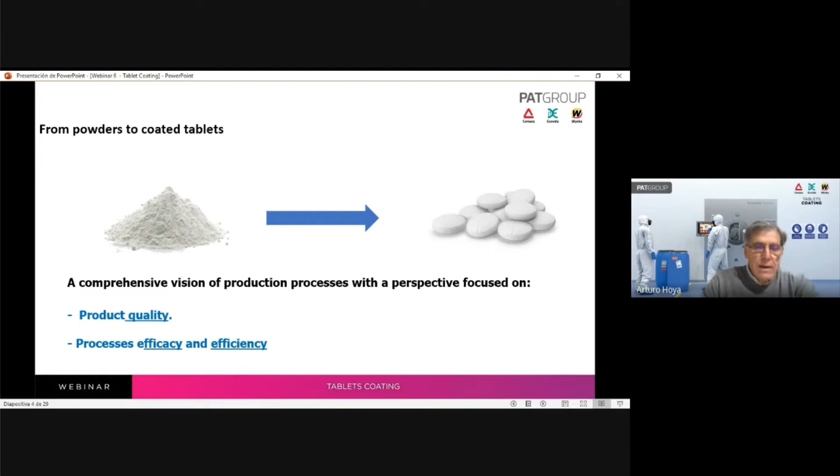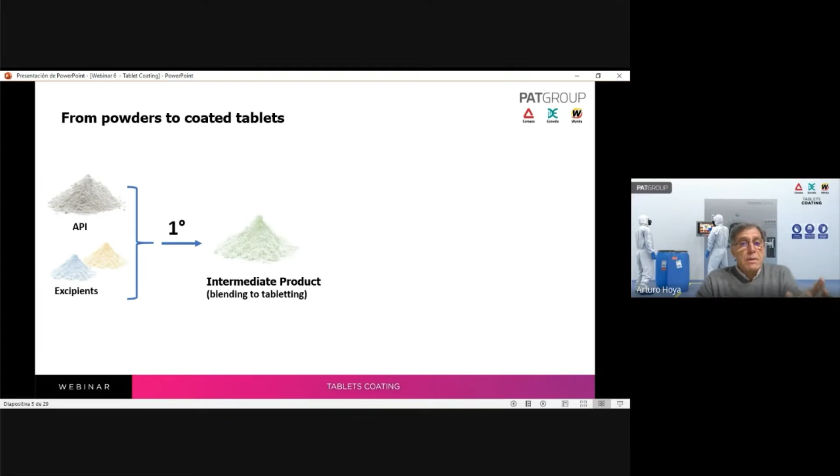Here I show the sequence from the raw material, API and excipient powders, transformed into intermediate product. We saw this in the first webinar. The second step is transformation into the tablet, and today we will present the coating of these units. This is the process.

In many cases, this unit operation, the coating, is the last operation, but not only the last, it's also a critical operation, because the tablet will be sprayed with solvent, normally water, and this requires a very, very tuned process, very controlled, very monitored, very automatic process. This is a very important question.

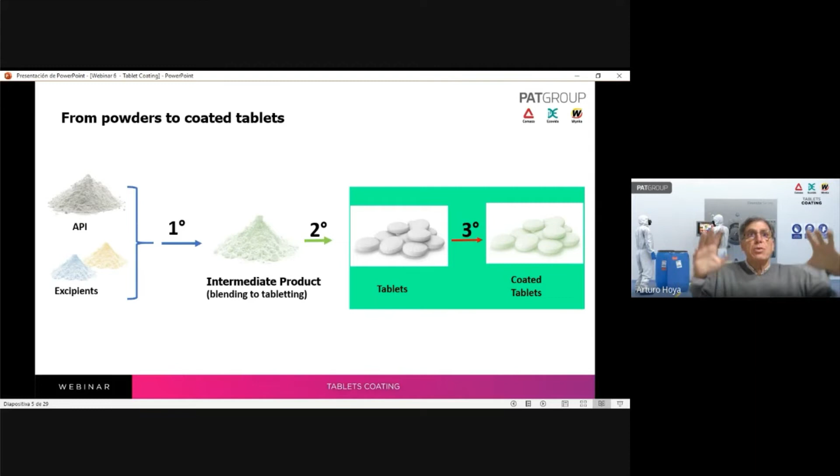This is true because we need to reach a thermic equilibrium into the drum of the coating machine. Coating and thermic equilibrium.

Let's read: Tablet coating is a process of continuous application of a suspension or solution on a bed of tablets in continuous movement, with permanent entry of drying air that provides the amount of calories per unit of time necessary to evaporate exactly the same amount of solvent that is applied, and in which the temperature of the tablet is kept constant.

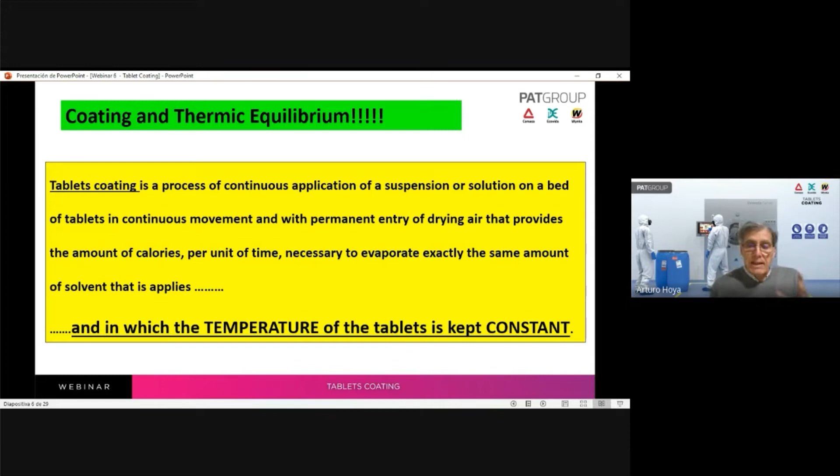This is very important to keep in mind, because any imbalance between the solvent flow rate - grams per minute of suspension or solution introduced in the tablet bed - and the calories added per minute by the drying air, can determine the spoilage of the batch of tablets. This is a very big and common problem in the industry. If you do no control or no monitoring, you can fall into this type of problem. We will come back to this aspect of the process in the next slide.

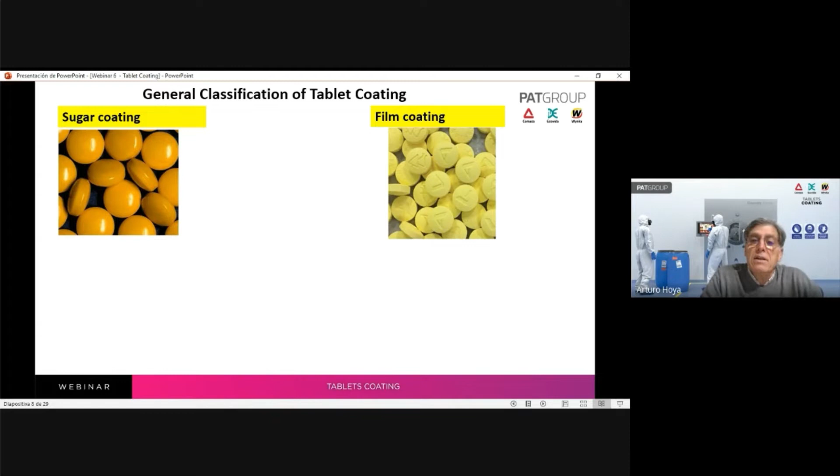But now I wanted to take a look at the classification, the general classification of tablet coating. You remember that the older coating was sugar coating, and the more modern one is film coating with a polymeric material. This film coating is normally water-based, though it could be organic-based, but more commonly water is the vehicle for the polymeric suspension.

In comparison between them: in appearance, tablet coating with sugar has an excellent finish, rounded and shiny, while tablets with film coating preserve the contours of the tablet core. The weight gain in the case of sugar coating is very high, 20 to 50 percent, while in the case of film polymeric coating it's 2 to 6 percent, which is very small.

Logos and engravings are not possible with sugar coating, but they are possible with film coating. Look at the photograph. As for coating thickness, with sugar you have millimeters of thickness, but with film only microns, 20 to 200 at maximum.

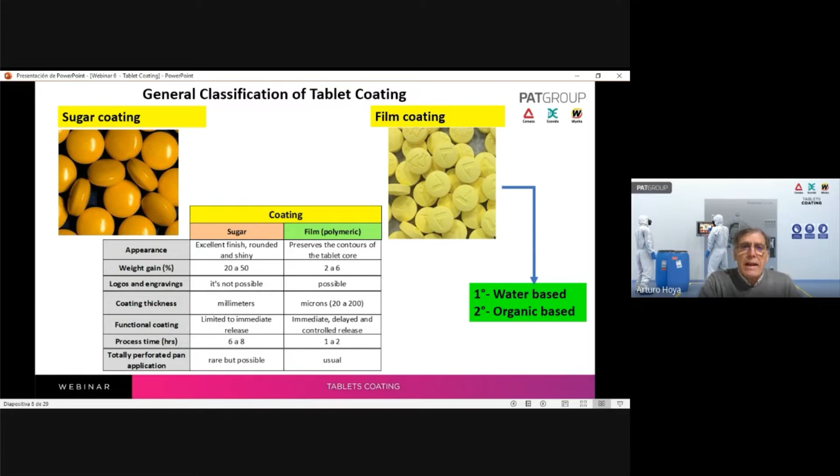Now I wanted to show you some qualities of film coatings. The finishing product is very, very good.

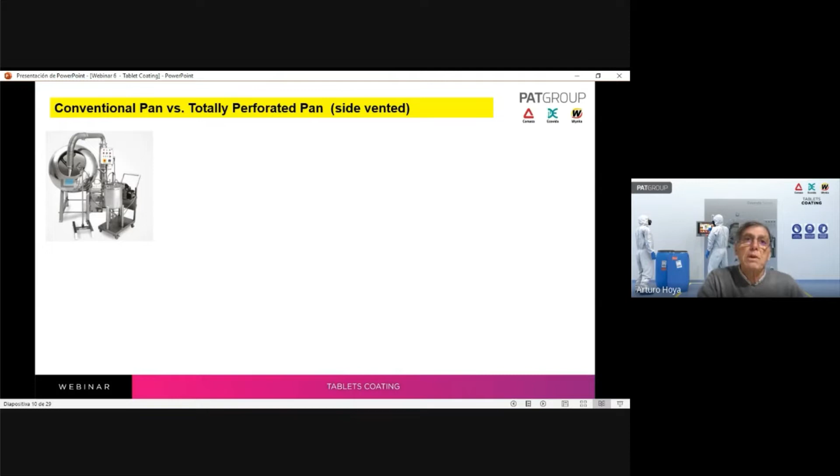I want to show you this comparison between the conventional pan and the totally perforated pan, called side-vented, because the drum inside the machine is totally perforated with holes about 2 millimeters in diameter. This is a typical conventional pan.

Automation is minimum in the case of conventional equipment because it's older, while you have total automation when you have a side-vented pan.

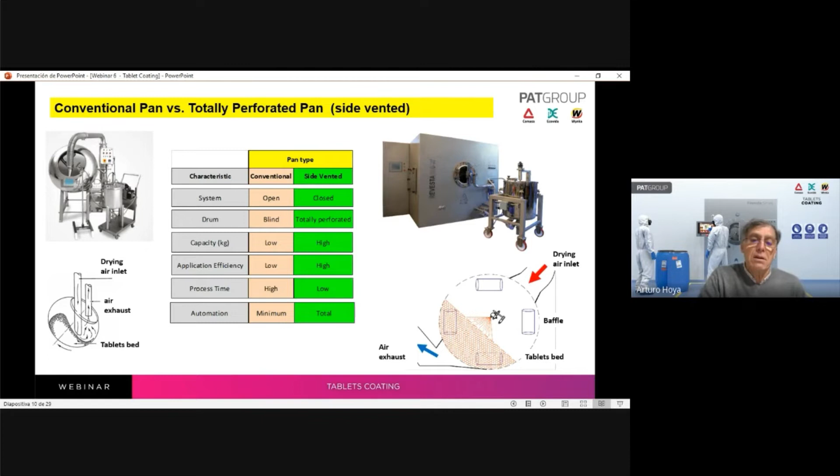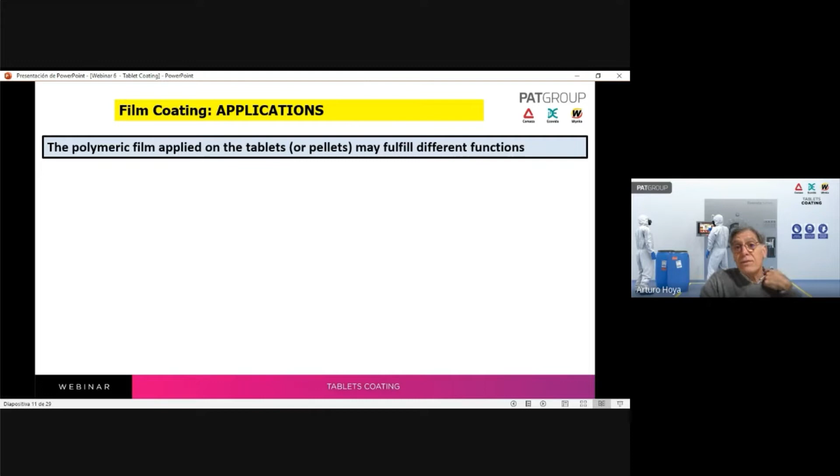Now I wanted to show you some applications: when do we use tablet coating? The polymeric film applied on the tablet or pellet may fulfill different functions. The first and most common function is identification, appearance, and marketing. We call this cosmetic coating; it's very common and the frequency is high.

Then you have the possibility of taste masking. This is common too, because much of the API, the drugs, have a bitter taste, so you need to cover this. By using film coating, you can neutralize the bitter flavor.

The other question is the stability of the API, the stability of the component against the external environment. You can make a barrier to moisture, for example. You put a subcoat of polymeric material, and you isolate the tablet core from, for example, the relative humidity of the environment. Then you put the second layer of coating to finish the process.

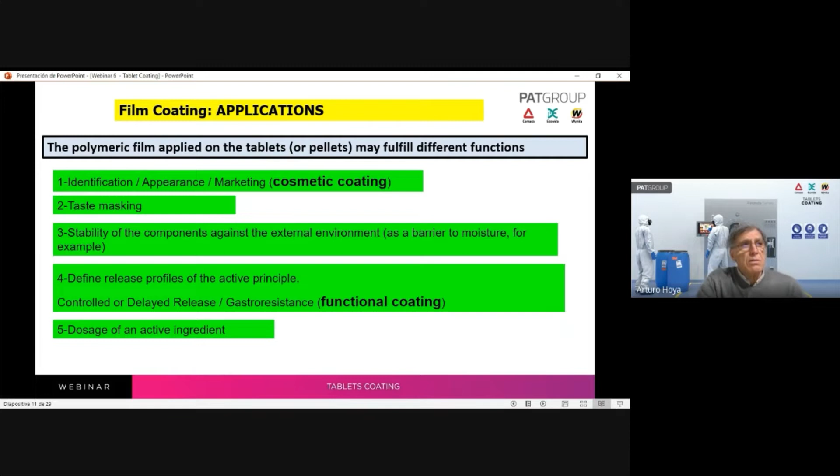The fifth application, for me, is not so widespread in the world, but it's very important: the dosage of an active ingredient into the coating, the film on the tablet. This is possible. I have worked on this subject for many years, and it's very interesting.

For example, if you want to separate two APIs that interact chemically, you need to separate them. So you make a tablet with API 1, then cover it with a polymeric subcoat, and then apply a suspension with API 2, dosing the API so that API 2 is separated from API 1. This is a very important application, and it's not complicated—you can do this by taking some controls.

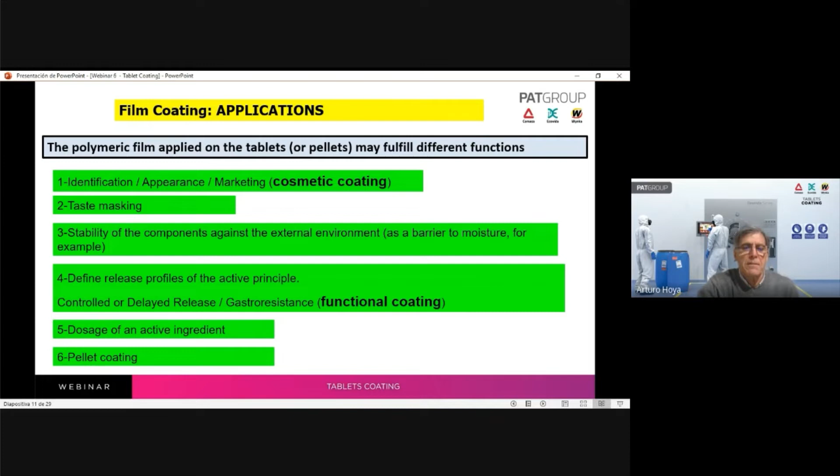And the other question is, you have the possibility to do pellet coating. About this, I will present a short case study at the end of the presentation.

Now, a very important aspect is whether it's possible to scale or replicate the coating of equal mass of tablet between a conventional pan and a totally perforated pan, because in the pharmaceutical industry, conventional pans are being replaced by side-vented ones. So it's very important to keep in mind the scaling difficulties in this process from conventional to totally perforated.

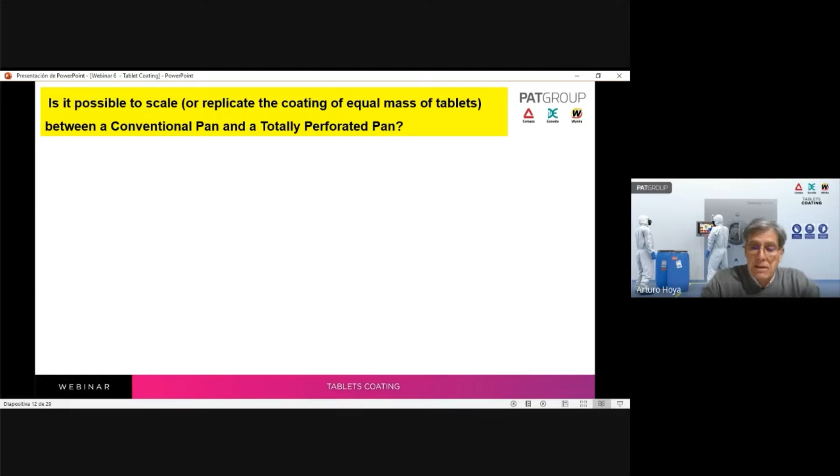Let's look at this. This is a typical conventional pan, and this is a typical totally perforated pan. The question is: is it possible to scale or transfer the process? Well, the answer is: it's not possible. It's very difficult.

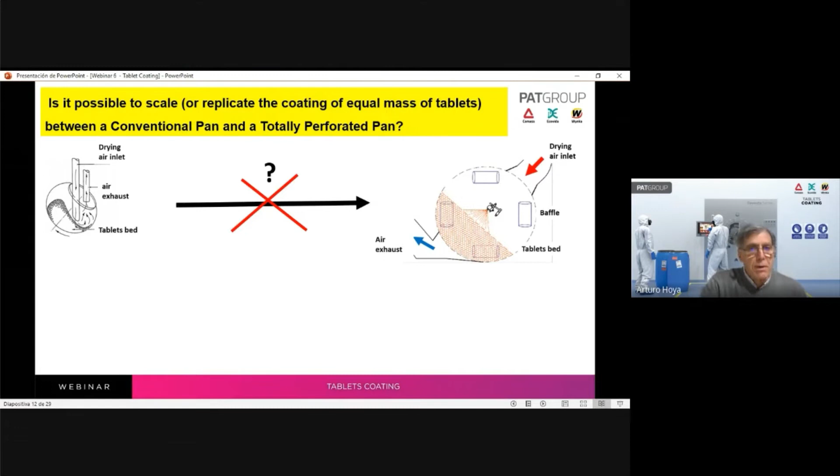Why not? Because, first of all, there's a lack of geometric and functional similarity that prevents the scaling or transfer between both equipment. The different geometry of the pans makes it very different, because the movement of the tablet bed is different, the residence time of the tablet under the spray cone is different, and the air circulation is different.

This results in an inadequate balance between the entry and exit of air in the conventional pan, with drying occurring superficially in the conventional pan, versus across the bed in the side-vented pan. This gives greater efficiency in the case of the totally perforated pan. It's a very important question.

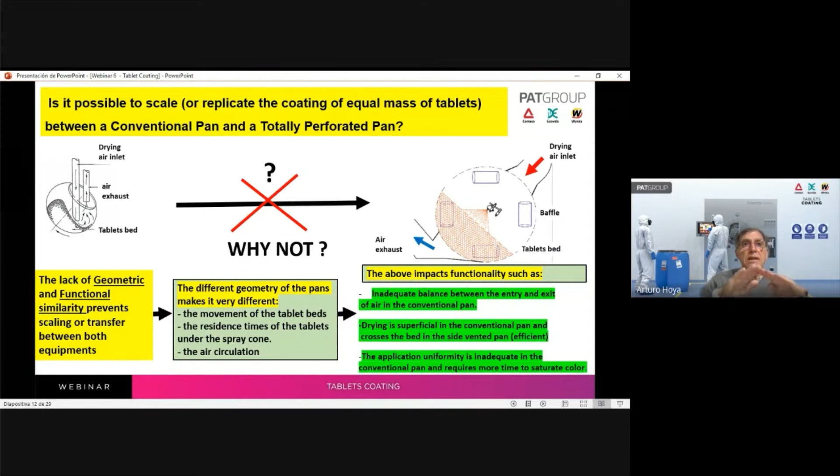And of course, the uniformity of application is not good in the conventional pan and requires more time to obtain the saturated color. These are the difficulties you have in scaling this type of process.

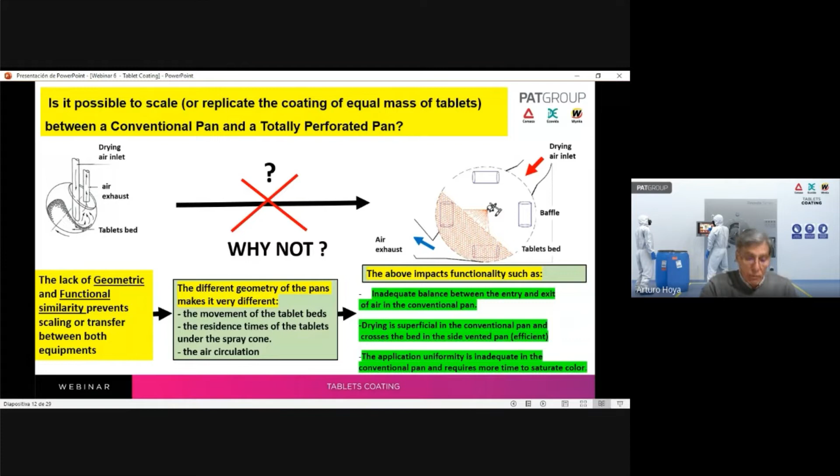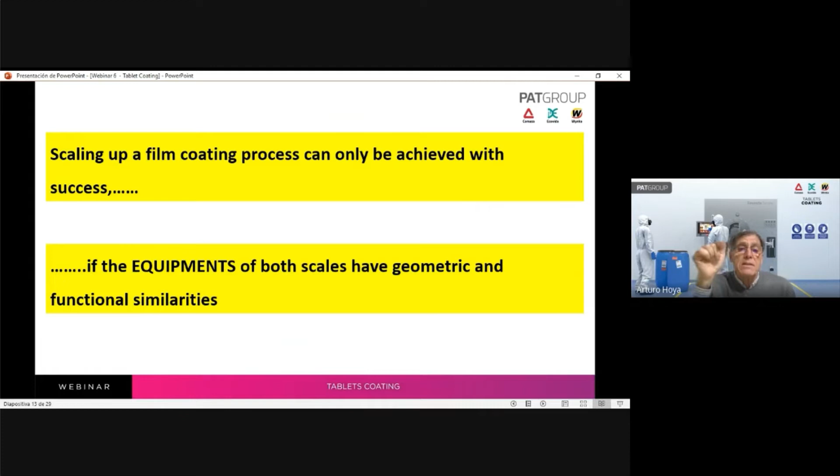Now, scaling up a film coating process can only be achieved with success if the equipment at both scales have not only geometric but also functional similarities. This is a very important question too.

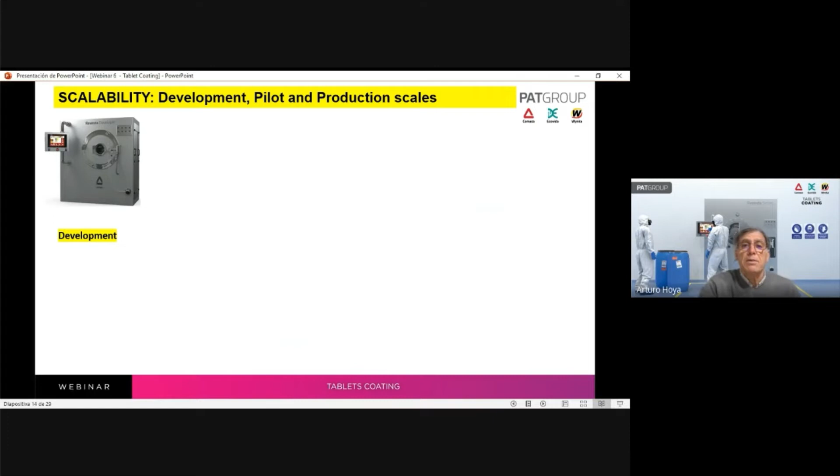You have here the scalability from development, pilot, and production scale. Here is the development, this is a pilot with interchangeable drums, and this is the production. So, a coating process is very simple to scale to pilot and from pilot to production using a characteristic scaling factor, the index.

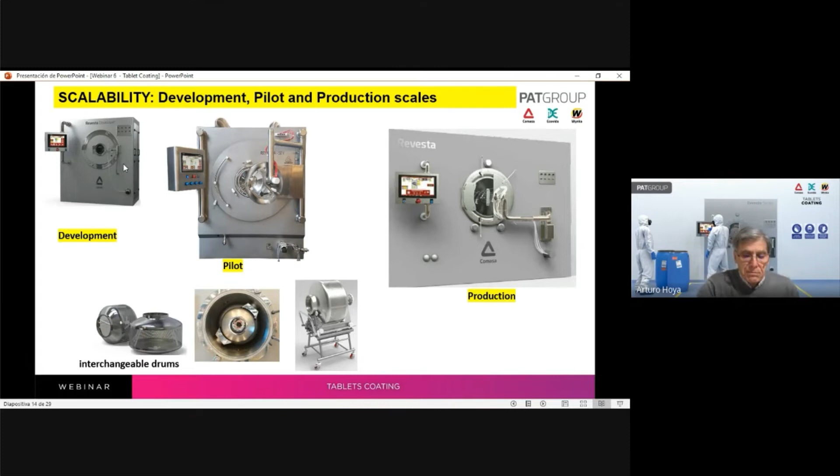So you need a good tablet. This is the first question. This is why we pay attention to the process of granulation and compression. It's very important to have good tablets.

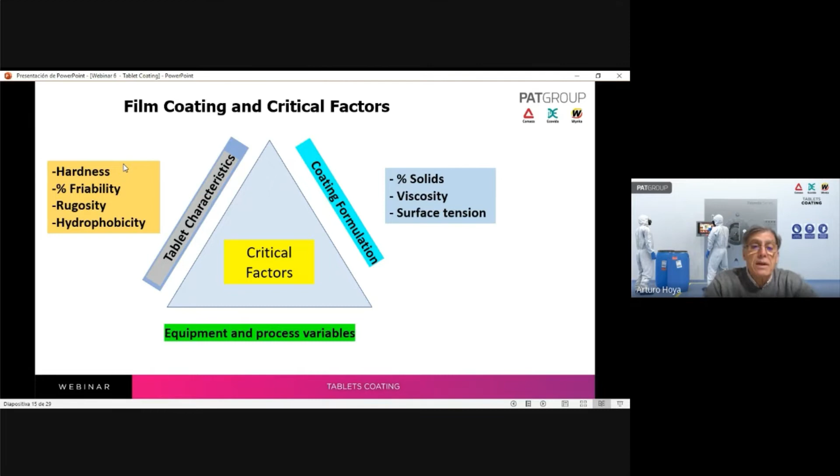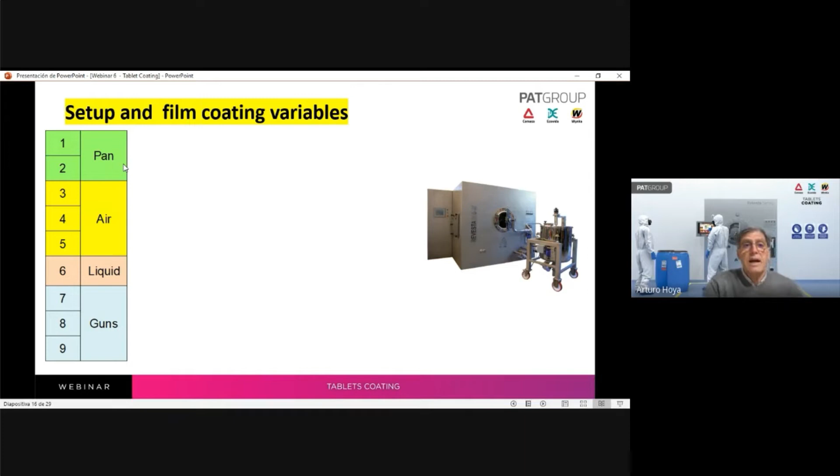And the equipment and process variables are the other side of the triangle. So it's important to take a look at the equipment and process variables, the setup and film coating variables. As you see, we have four blocks: the pan, the air, the liquid, and the guns.

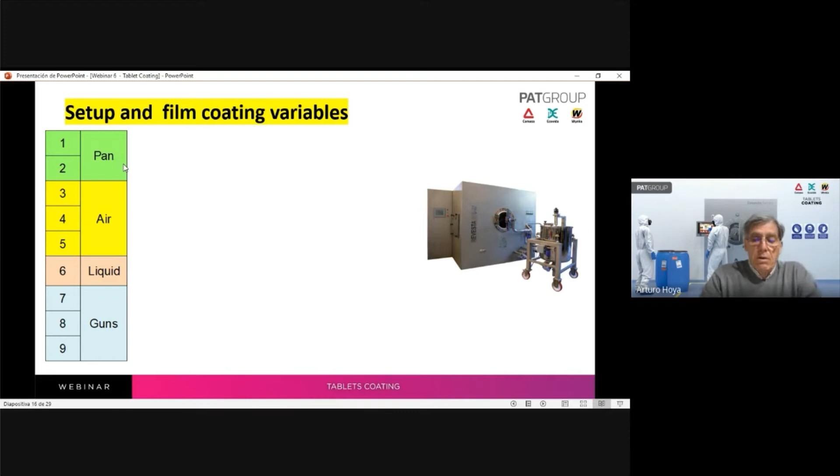And each one has its characteristics. For example, for the pan, it's important to consider the pan rotation speed, the RPM, the drum rotating into the machine. It's a very important variable. Also the shape, the size, and the number of baffles. Baffles are structures inside the drum that move and deviate the direction of tablets in the tablet bed.

During the rotation, the baffles increase the mixing of the tablets and enhance tablet uniformity. This is a very important aspect. A drum without baffles is not good, because the bed could move in a very non-uniform way.

You need the tablets mixing all the time. So you obtain this movement with a high RPM rotation speed of the drum, and with appropriate shape, size, and number of baffles into the drum. These are two variables, and you can fix them as you want.

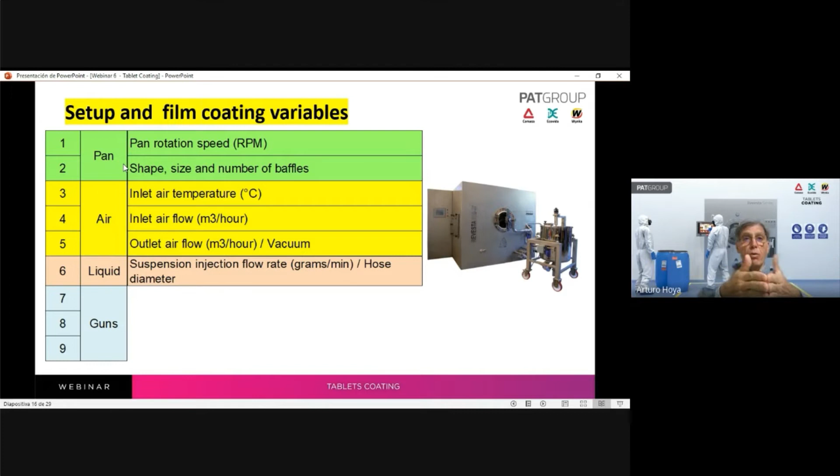This liquid is incorporated with the guns that have two lines. One line is the suspension or solution line, which comes from the peristaltic pump, and the other line is air with pressure. The conjunction of both fluids into the gun will produce the aspersion, the atomization, the spraying, producing a very tiny drop.

This very tiny drop will impact on the surface of the tablet and will begin to form the polymeric film. So you have to adjust the injection flow rate of the suspension or solution, and adjust the pressure of the air, in order to obtain an appropriate drop size.

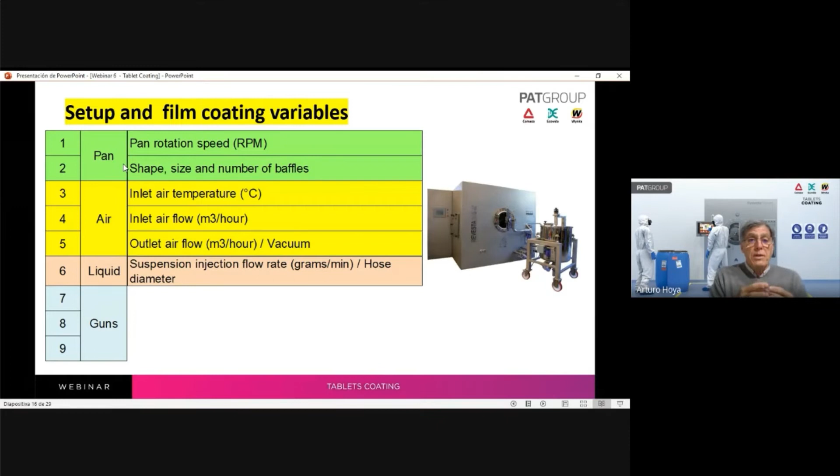And of course, the flow rate is in accordance with the calories you enter via the inlet air flow and temperature. Inlet air temperature and inlet air flow define the calories you need to evaporate the water introduced with the suspension.

Well, another question is about the guns: what is the number and type of injection guns? You can have 1, 2, 3, or perhaps 4. It depends on the diameter of the drum.

The other question is the geometric configuration of the injection guns. You have the boom, which is the axis where you put the guns. So you need to define the distance between guns, their point, the direction of the guns, and of course the atomizing pressure and the air pattern of the guns.

As you see, there are many variables, but it's very important to keep them in mind, because they define the quality of the process.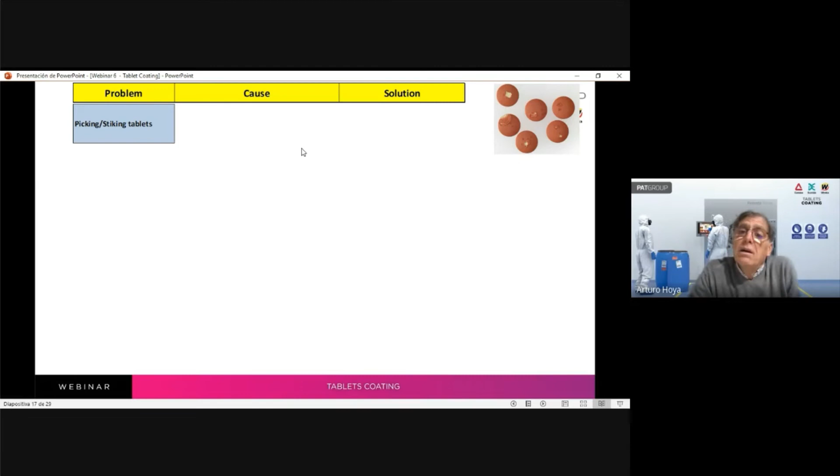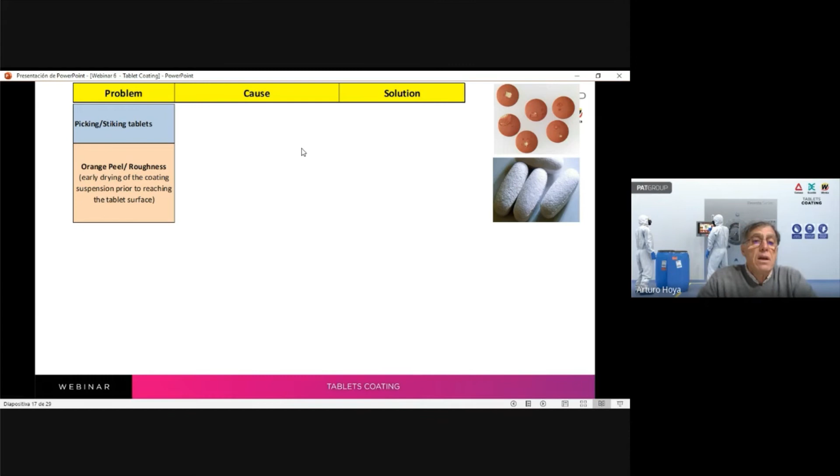The problem is very extensive, and we don't want to overwhelm you with information, but just some of the typical problems. Of course, the typical ones are, for example, picking and sticking of the tablet. You have on the right a typical picture - these are picking. The orange peel or roughness, where the surface is like an orange peel. The lack of uniformity in the color of the tablet, with some more blue - this is not good. And tablet edge erosion is another problem.

Again, other problems exist, but these are very common. So for picking, the cause is overwetting due to an imbalance between the suspension injection rate that exceeds the drying capacity, as we said before. So what is the solution? Reduce the suspension rate, or increase the temperature and/or the drying air flow rate, so you compensate.

Orange peel means excessive drying due to an imbalance between suspension flow and high temperature or drying air flow. So what you need is to increase the suspension flow and reduce the temperature.

Another possibility is high atomization air pressure. If the air pressure is very high, the drop becomes very tiny, and the tiny drop dries before reaching the surface of the tablet, impacting in a dry state, fixing to the surface and producing this roughness. So all you have to do is adjust the pressure.

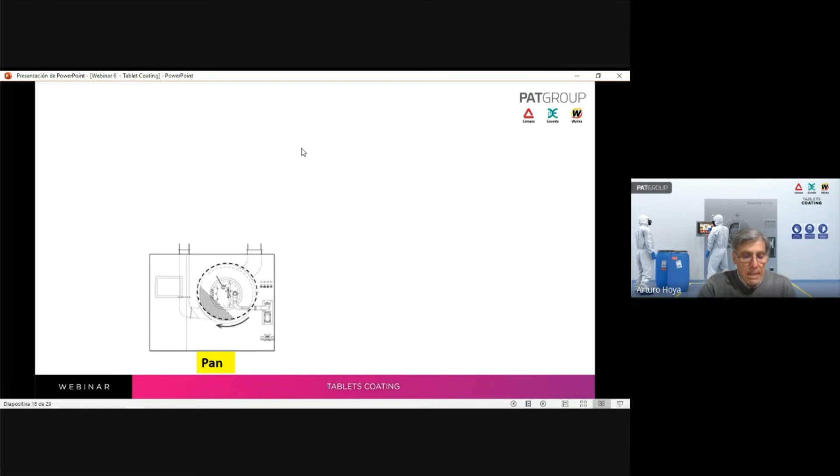Now I want to show you the pharmaceutical area and the technical area of a coating process. The black line separates both.

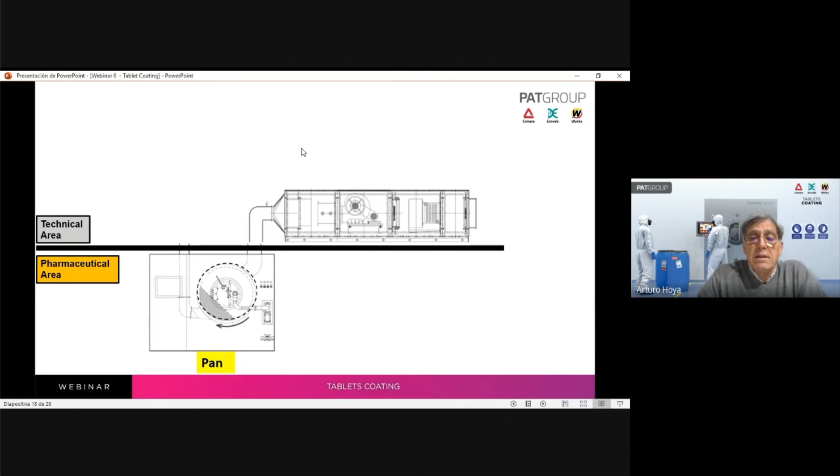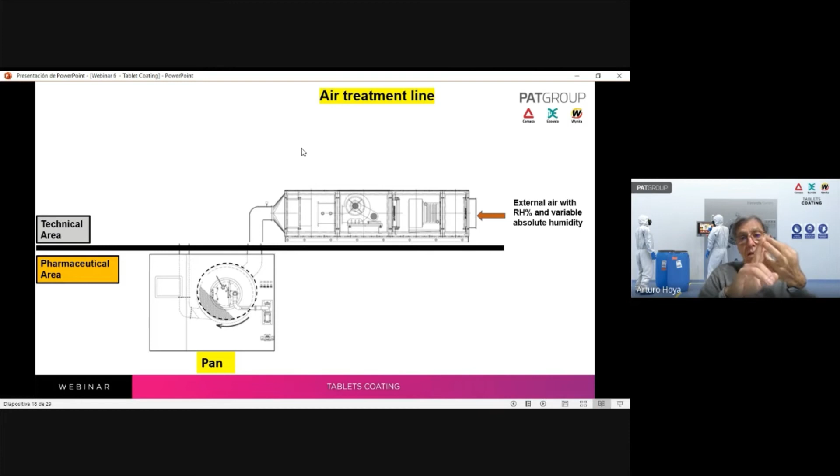As you can see, the pharmaceutical area is below, and in the upper part you have the air treatment line, because the external air normally has high levels of relative humidity and absolute humidity, particles, microbials, etc. So you need to treat this air in this air treatment line.

The air passes through a cooling coil for eliminating the absolute humidity, then passes through a coil that heats and reduces the relative humidity. Here you have the air injection turbine, this is the motor that injects the air. Of course you have here an HEPA filter because you need air with pharma quality.

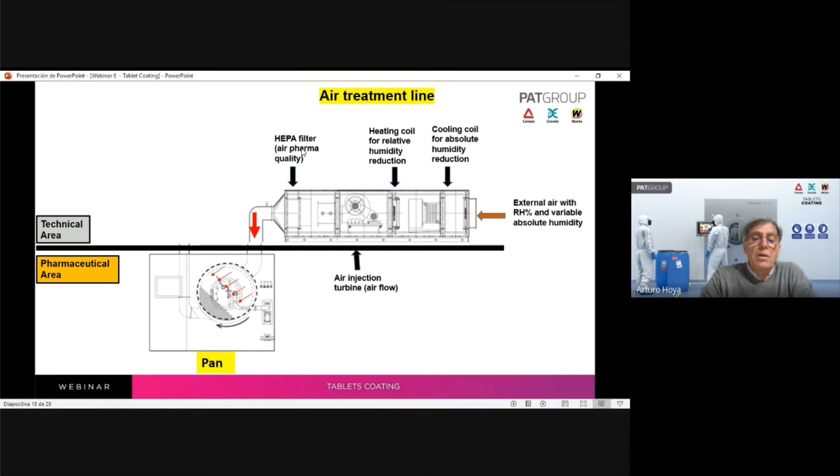This is very, very important. The air goes through the ductus to the drum, and this is very important because this drum, as you can see, is totally perforated. It's not blind like a conventional pan. So the air passes through the bed, and the efficiency of drying is very, very high.

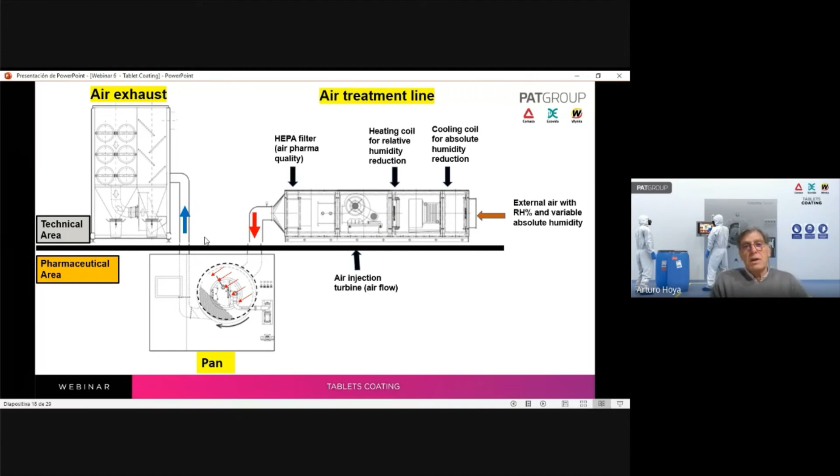Here we have the air. Let me show you that in red is hot air. The hot air passes through the tablet, removes the water, reduces its temperature, and increases its absolute humidity and relative humidity. So here it is with low temperature, high absolute humidity, and high relative humidity. This is the air treatment.

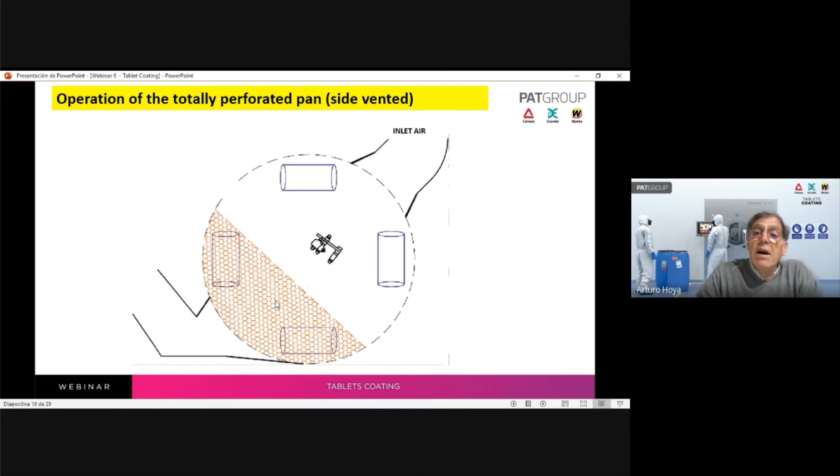So let me show you. Inlet air here, inlet air. The inlet air has a high temperature because this means calories, has low relative humidity because we removed it in the treatment of air, and has an inlet airflow of X meters cubic per hour.

Well, this enters and the drum begins to move at RPM, this is drum speed. Start the suspension injection at the spray rate defined. This means it continues, and the air exhausts with low temperature, high humidity, and with the outlet airflow rate Y. Y is bigger than X.

So inside the drum you have vacuum, vacuum in the order of 0.1 to 1 inch of column of water.

Well, but the very important question here is that the sensor, this temperature sensor, controls the process, because we need the temperature measured by this device kept constant. If this temperature is kept constant, that means we have thermic equilibrium, and that means the tablets are not overwetted and not overdried.

So this is the key of the process, to reach a thermic equilibrium. The Revesta machine of coating has many sensors and the possibility not only to monitor the process, but to modulate the coating process. So look at this.

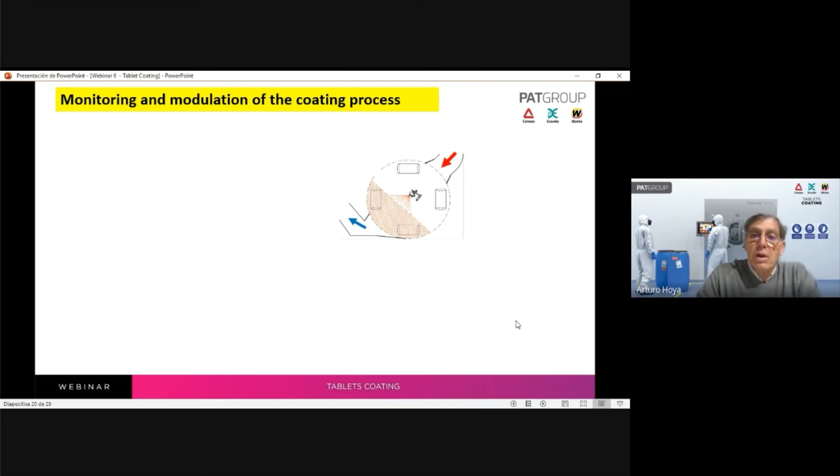You have here temperature versus time: the temperature of the drying air, the hot air with its flow rate and low relative humidity. And as you can see, here is the temperature of tablet air exhaust, which is measured by the PAN sensor. The PAN sensor permanently measures the temperature of the tablet.

At the beginning, the temperature is low, but with the pre-warming, the temperature is in the order of 70 degrees, the temperature increases, and now it's here at a high level, let's say 45 degrees. This is the ramp heating and modulation.

Okay, now if we turn on the suspension injection, the polymeric suspension, here we will note a depression, a minimal depression of the temperature of the tablet, because the sensor detects a reducing temperature. But it increases and returns to the temperature of, for example, 45.

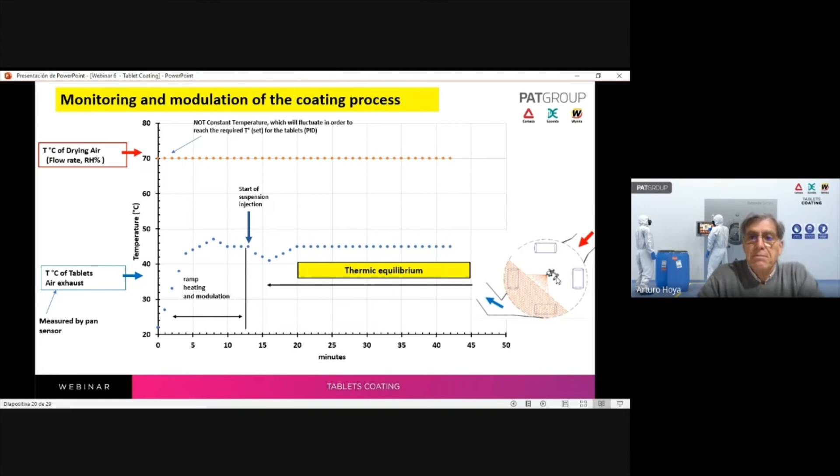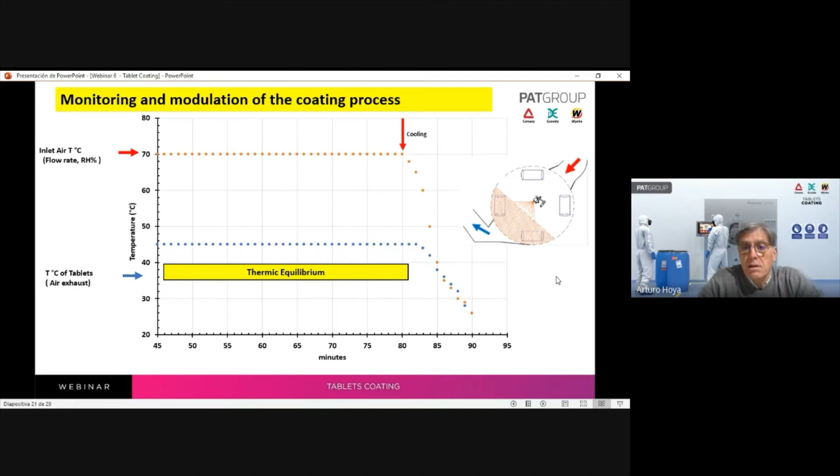Okay, let's suppose here we are with a process, a stable process, no problem, equilibrium, and well, we finish the process at 80 minutes, for example. Cooling, we turn off the vapor or turn off the resistance of heating, and temperature falls, and the process is finished.

Here, well, is another explanation about monitoring and modulation. Here we have this question. The process is in thermal equilibrium here, but in a moment the flow rate from the peristaltic pump falls. If the flow rate falls, a disbalance occurs between the solvent and the calories needed to evaporate it.

In this case, we have an excess of calories. So the temperature increases, as you know. So the steam valve control or the resistance deactivation acts in order to reduce the temperature, and the temperature reduces, and you obtain the equilibrium again.

But then, let's suppose you remove the silicone tubes in order to enhance the flow rate. So here the flow rate increases. The water going to the tablet increases. So a little depression in temperature occurs, but this is detected by the PLC and it responds by increasing the activation of the valve or the resistance. So the thermal equilibrium is reached again.

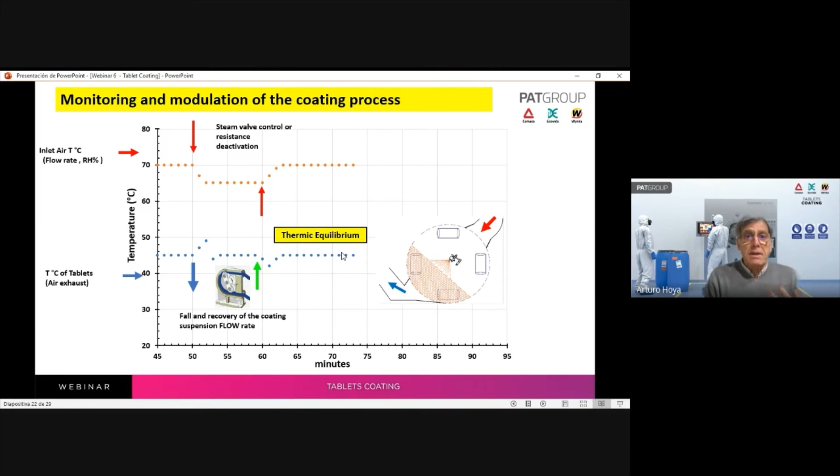So the Revesta film coating machine has not only a structure configuration and a variable configuration, but also a system with monitoring and modulation of the process in order to avoid any problem derived from flow rate issues or excessive temperature. These are very controlled processes.

Well, finally, I want to show you a case study, because pellets obtained by extrusion spheronization process are very common these days. And as you know, the pellet with a cellulose base could be coated with a Glatt bottom spray, but it's very difficult because you have to control many variables, the problem of sticking, and there's a limitation of capacity.

But the cellulose pellet with API could be coated using a totally perforated pan. But the normal pan has holes in the drum of 2 millimeters, and the pellets are only 1 millimeter in diameter, spheric, of 1 millimeter diameter. So it's not possible to use a typical machine with this type of hole.

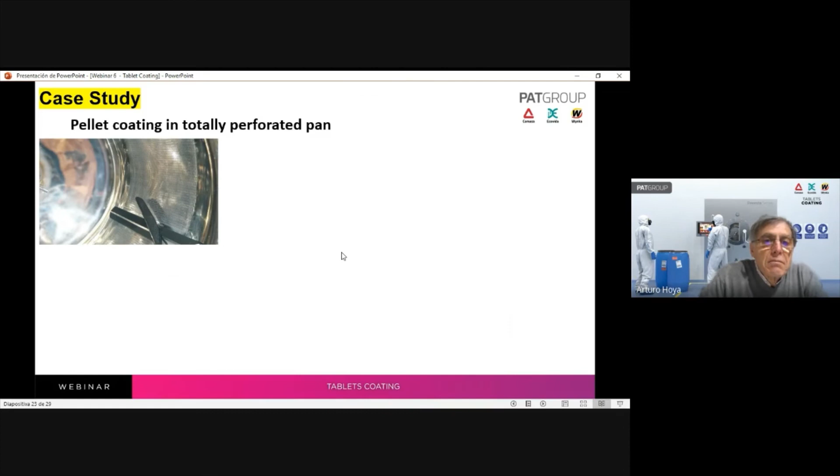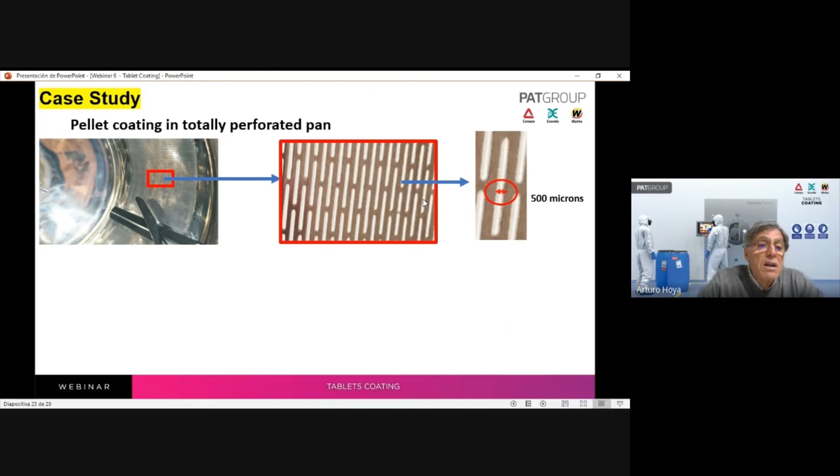Here we will show this type of drum, a perforated drum. Look at this, this is it. Here we have this structure. The perforated drum does not have circles of 2 millimeter diameter holes, but long apertures of 500 microns. 500 microns retains the pellets, the spheric pellet. These are the pellets of cellulose with active ingredient.

So the pellet distribution, the typical pellet distribution, is this. So you have here 500 microns here. So the great majority of the pellets can be coated in this machine, and you don't need to set up the complicated bottom spray process, and you increase a lot the capacity of the process.

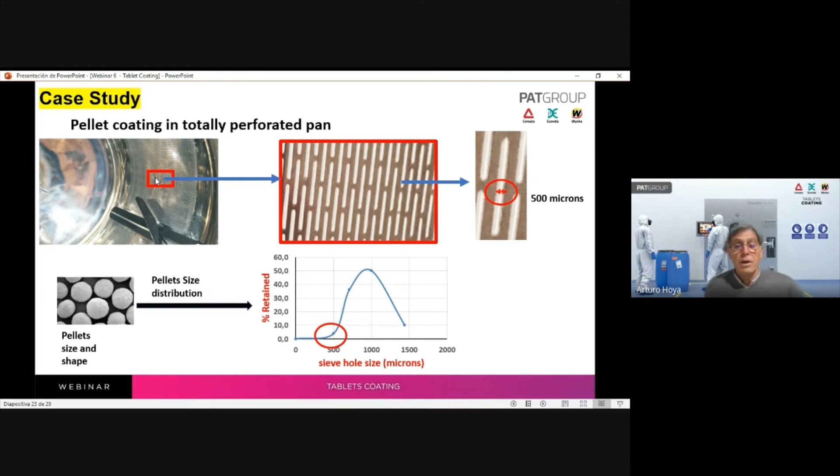So Revesta has an innovation about the perforated drum, because this type of window, long and narrow, lets the air pass through, but the pellets are not lost. Okay, here we have a typical process in the machine.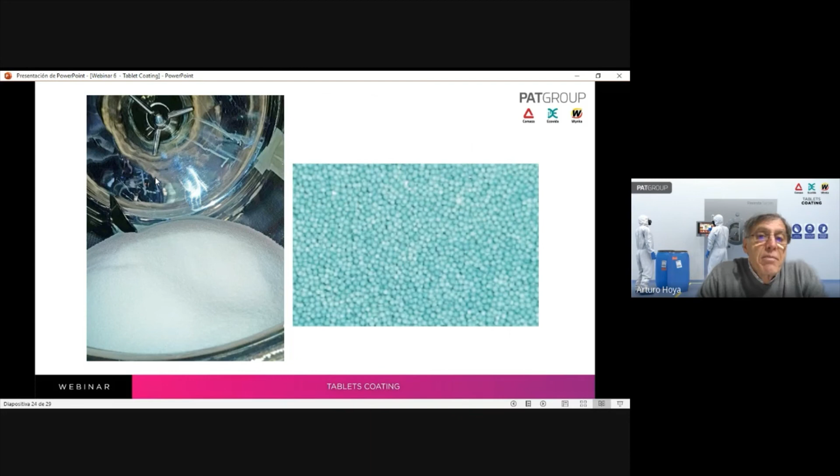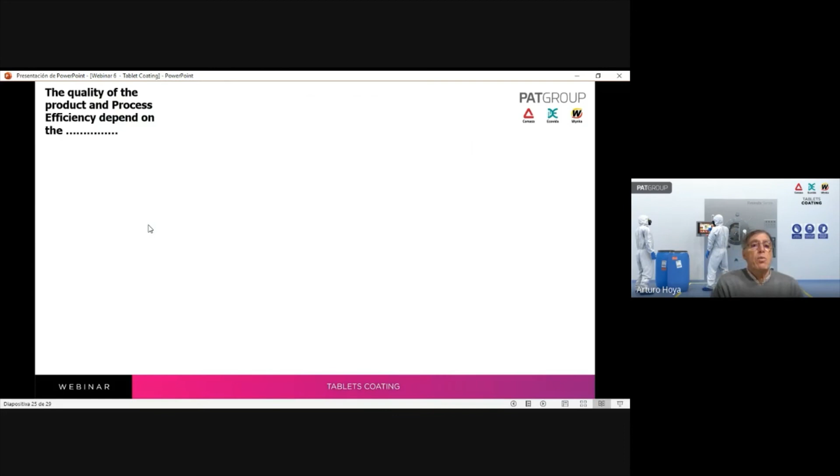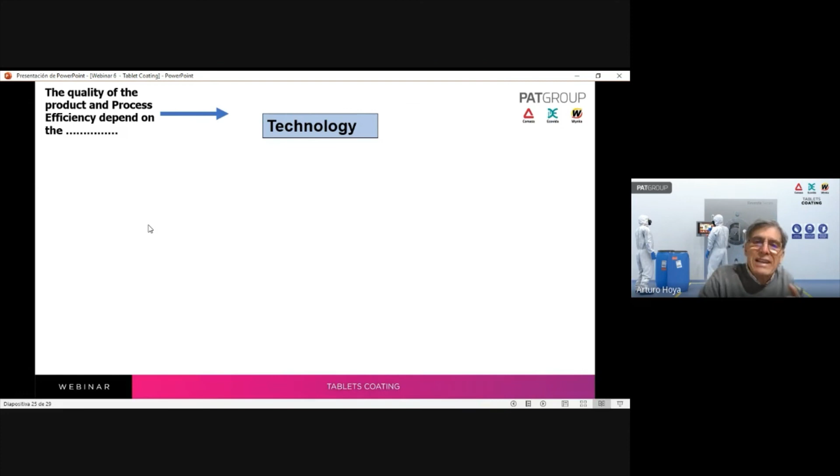Well, this is the last slide. You remember before that we put emphasis on the quality of the product, and the process efficiency depends on the technology we have, and I think we all think the technology is the most important, but it's not sufficient, it's not enough.

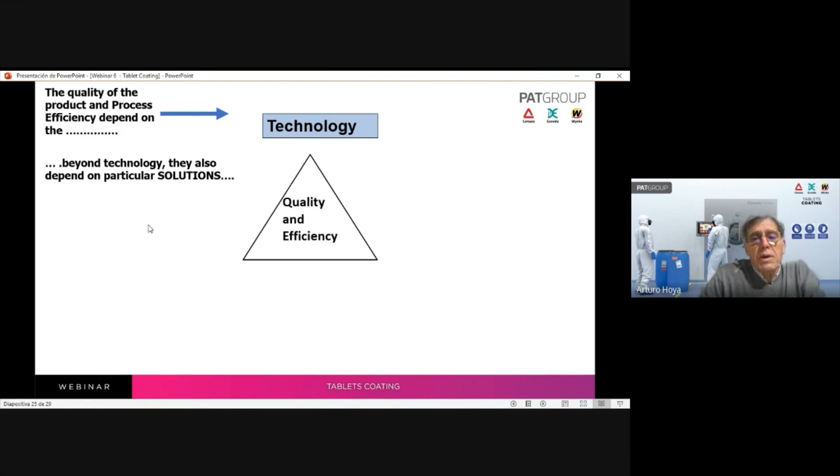Beyond the technology, the efficiency and quality also depend on particular solutions. We have the idea that quality and efficiency depend on the raw materials, the formula, and the manufacturing process. This trilogy is very important. You can have high technology, but if you have bad raw materials, formula, or manufacturing process, the quality and efficiency will not be good. You need equilibrium between these three parts.

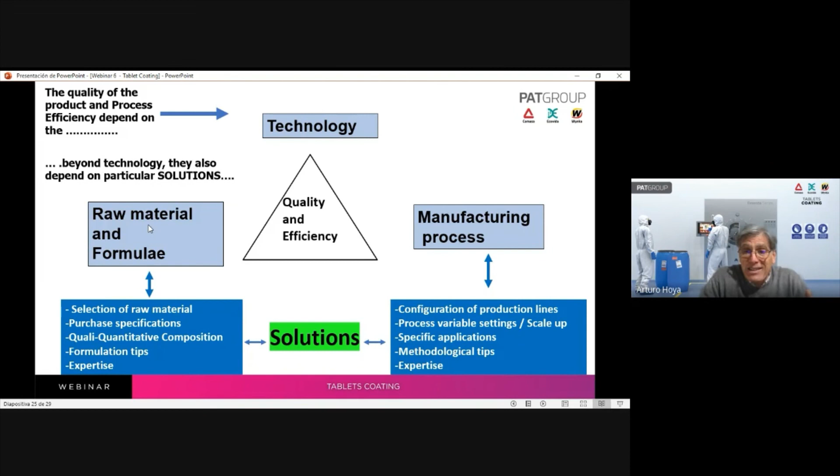So the solution, of course, is the selection of raw materials, the purchase specification, very sharp, quali-quantitative composition. To know formulation tips is very important, and to have expertise. In the order of manufacturing process, you have another aspect, because let's suppose you have very good technology, very good raw materials, and a very good formula, but the manufacturing process is not conducted well - you will have a problem. So configuration of production lines, the setting of the process, the scaling up if needed, the specific applications, and the methodological tips and expertise are very important.

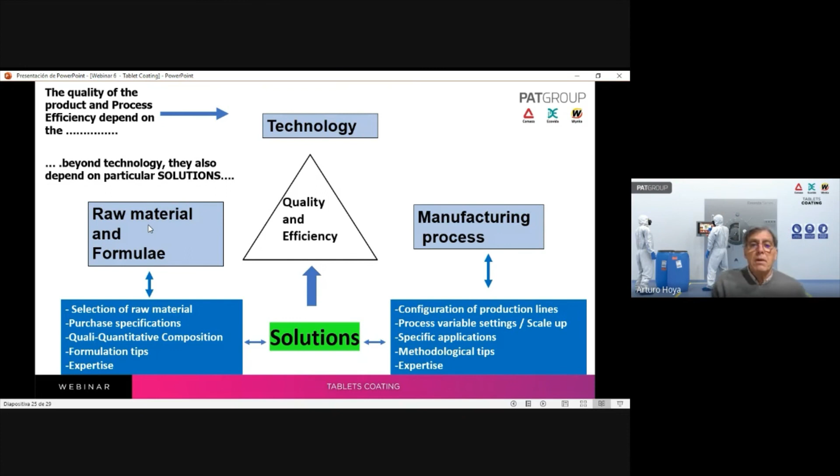So these are questions that from PATGROUP we give you solutions for, in order to achieve quality and efficiency in the process.

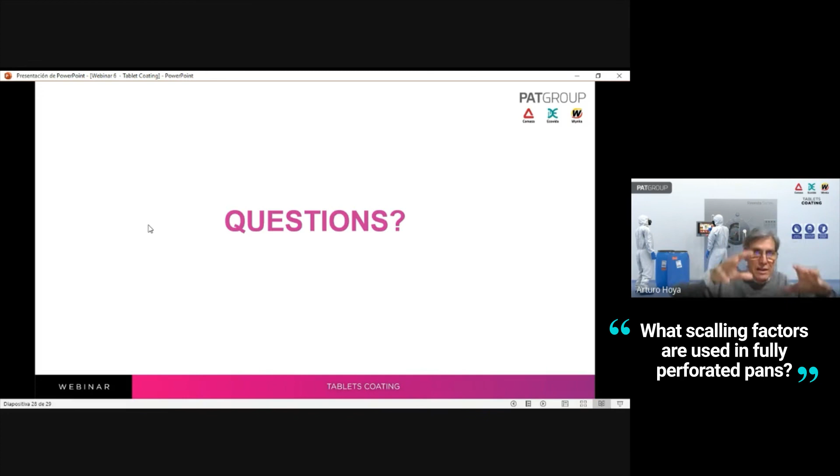You go to production, and now the cone is very big, but the size of the batch is very big too. If you maintain the number of tablets in the cone divided by the number of total tablets, this could be a good parameter to adjust the spray flow rate.

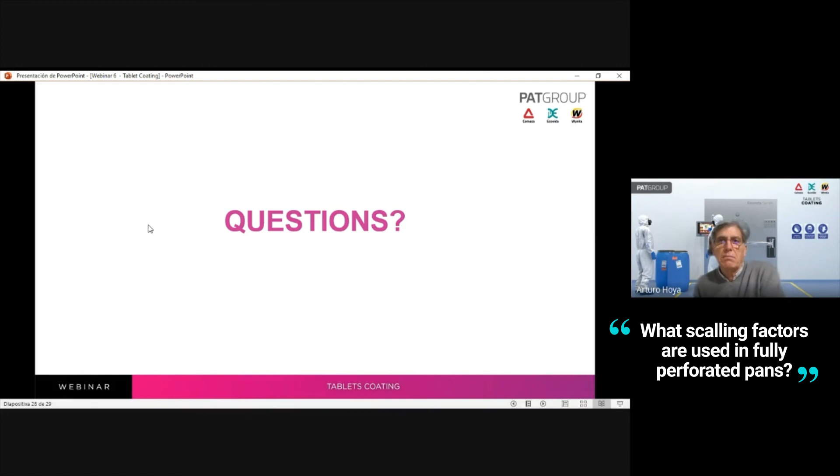Yes, but you could try, experiment, adjust - the most important thing is geometric similarity and dynamic similarity. If you have these two principal factors, the rest is not as important. You will reach the solution for the flow rate and the air flow you need to reproduce, in pilot or production, the process you developed at small scale.